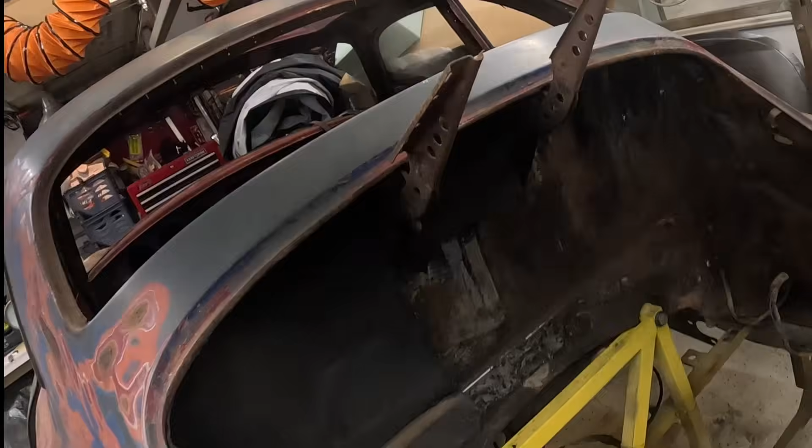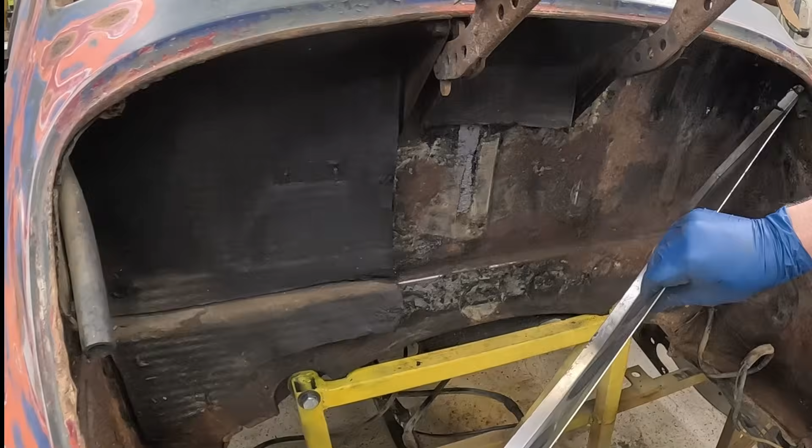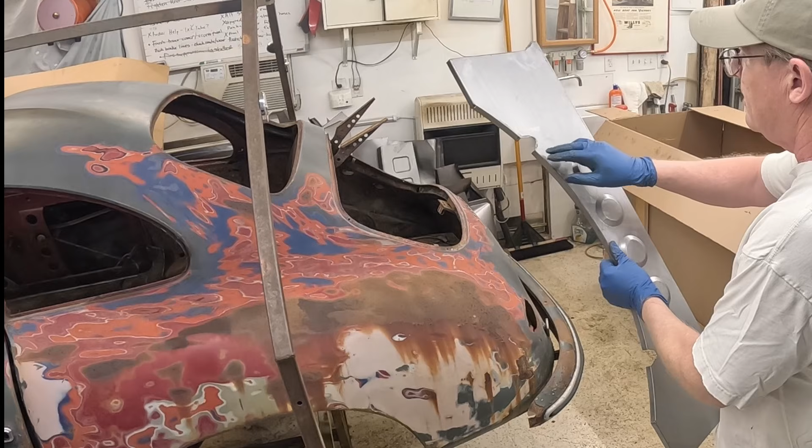This panel right here, but on the inside, yeah. So on the inside of the car, I've got a rust hole on that one that gets into some of these stampings, circular stampings, and I just want the circular stampings so I don't have to try and recreate those, and I'll probably just end up using that much of it.

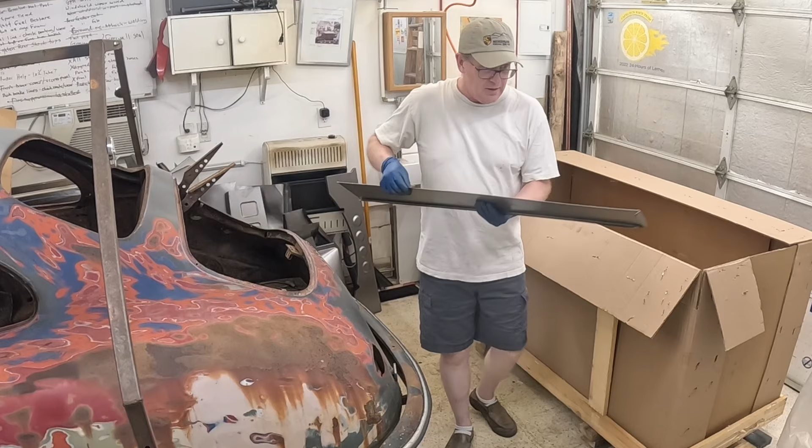Okay, this is the lower part of the passenger door. Got some rust in that lower edge. Let's look for that.

So these are all part of that, inside the inner and outer rocker. There's a tube that brings hot air from the back end of the engine up to your toes and the windshield. These are all braces that go through. The bottom of all my braces are rusted out, or the entire brace is practically gone.

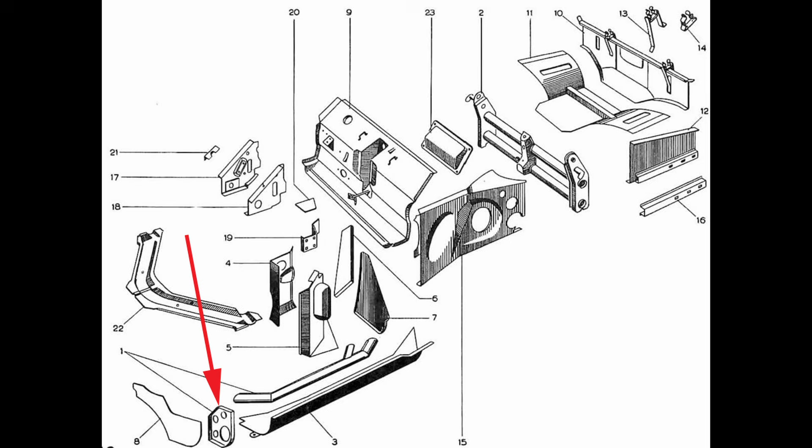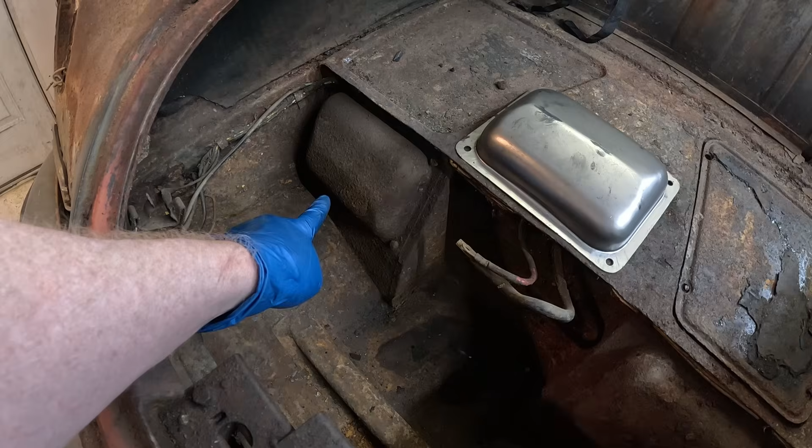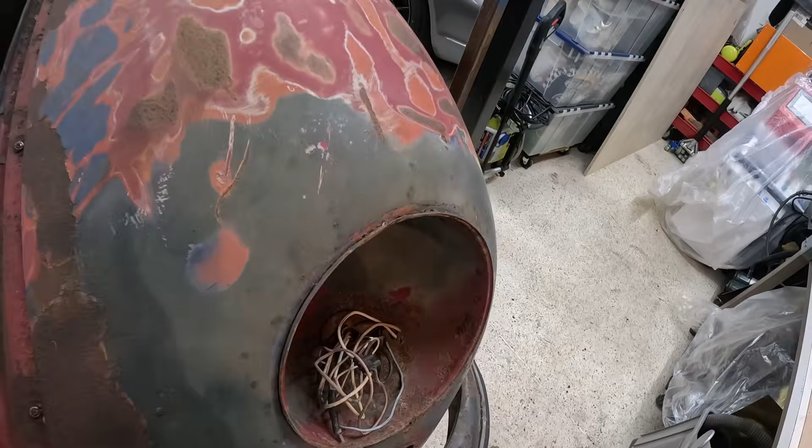Now, this is not rusted out on mine, but I think I'm going to add. So, right down here, that's what that is, and mine's actually fine. It's got a little rust crack, but this side, you see, this one's bolted on. This side is welded on, and this is the side, really, if you're taking the steering box in and out, that it would be handy to have removable. So I'm going to change this out to a removable one. It also will help with air conditioning plans in the future. I know, sacrilege, but we're going to do electric air conditioning on this car.

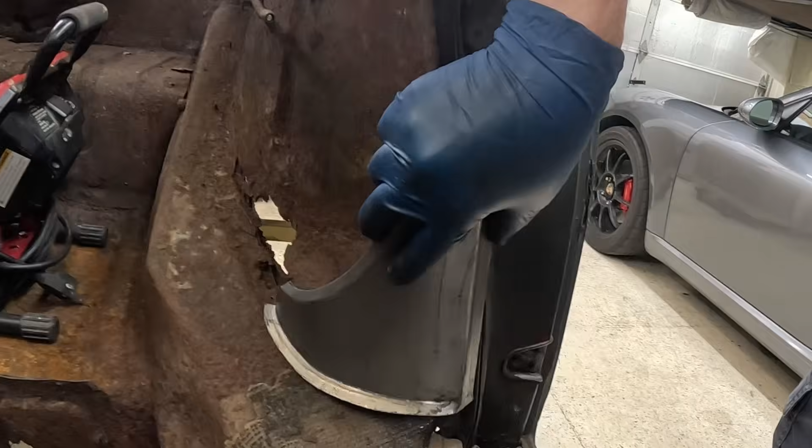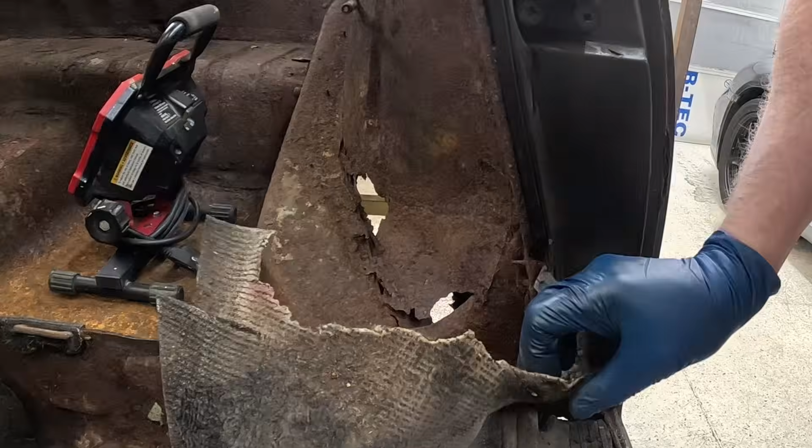Now, these, I'm pretty sure, let's go right here. Like that, maybe? And maybe they're up front here. No, I think these are the back. These go here. And that doesn't quite look right either, does it? Yeah, no, that's it. You can see this ugliness here. But I think this goes in here, goes deeper in, I think.

And some of you are looking going, no, Chris, that's not where it goes. Believe me, I will be double checking before I use anything.

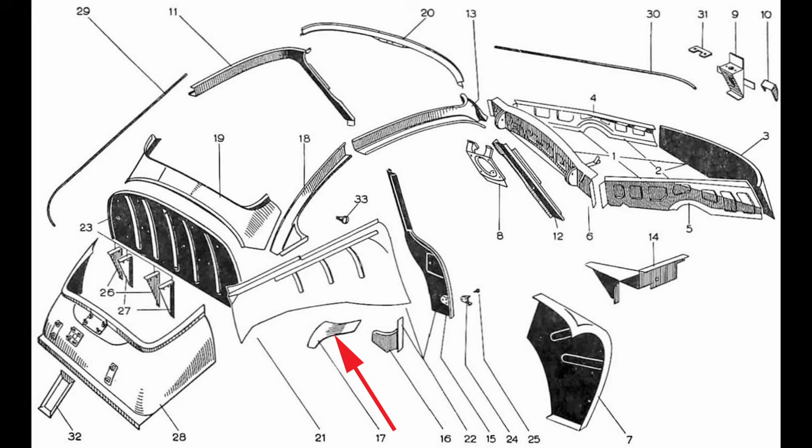Also, little corner pieces that if I were to try and hand form these myself, very nice.

Now, I believe these are reinforcements behind the shock mounts. These being the shock mounts. I think, again, I'll double check everything.

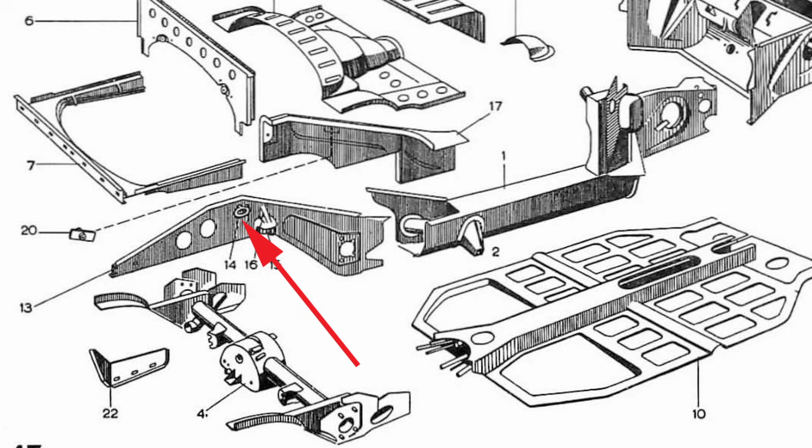And then these, pretty sure this is the bump stops when the suspension bottoms out. Yeah, so you got one on each side, driver's side, passenger side.

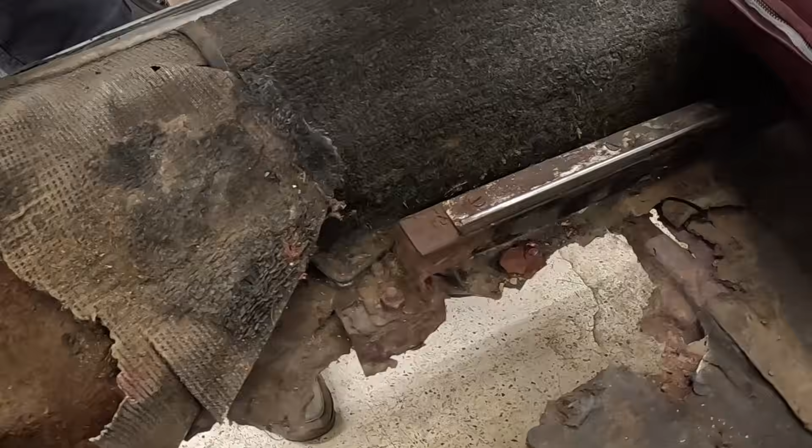And these are seat mounts, or the seat rail mounts anyway. There. Yeah, you can see it's a double. Go like that.

I can't remember. I think it has to do with a bumper mount. Yeah, was that back corner mount and bumper mount. This bumper got hit and pushed, made the crinkle and everything, and a crinkle in the middle that it mounts to. So let's put that.

These are more seat mounts. Pieces of hat channel, or I can't remember what those go to.

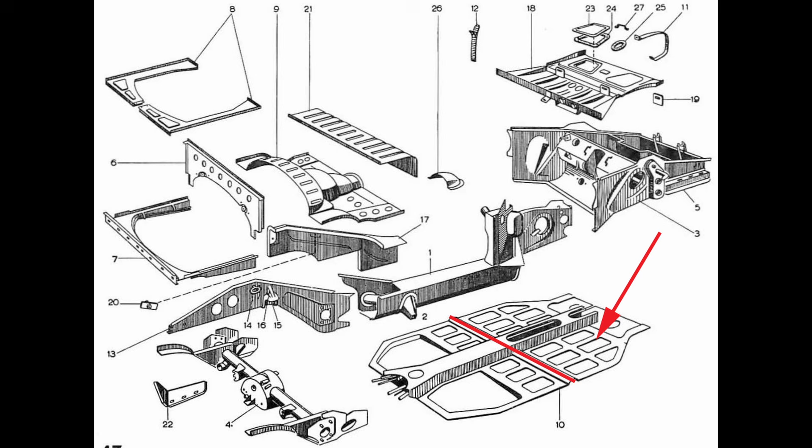Rear floor. And that's everything in the crate.

There's a couple more things that Trevor was still working on, the rear parcel shelf, and there was something else that he's still going to ship to me. But we're in no rush. We have plenty here to work with, so that is pretty exciting to get all that in.